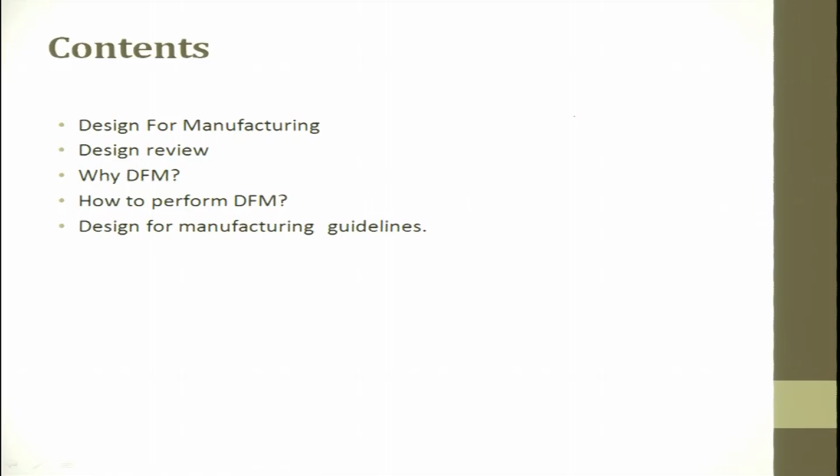In fact, food industries have started following design for manufacturing. The definition of design for manufacturing is a design technique for manufacturing ease of an assortment of parts that would constitute the final product after assembly. So it is not only for a single part, but for an assortment of parts.

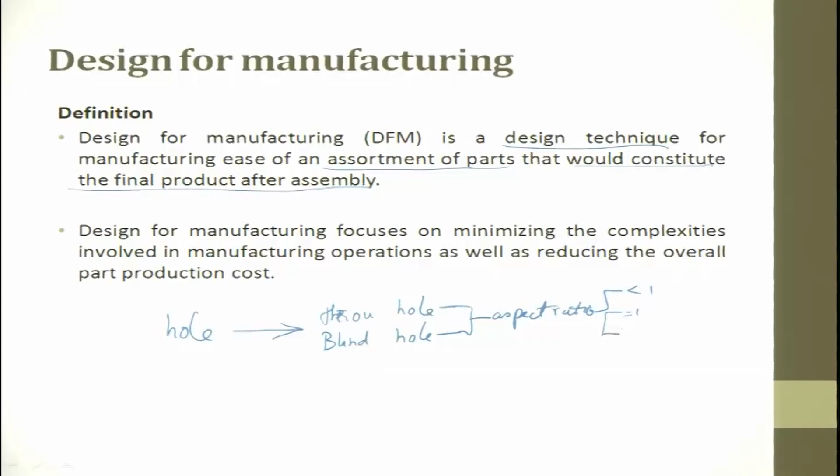For example, when I talk about a hole, you can have a through hole, you can have a blind hole, and you can have blind holes and through holes for varying aspect ratios, where the aspect ratio can be less than 1, equal to 1, or it can be greater than 1.

So you see here a hole, just a hole, and if the thickness of the material is very less, then this hole can be created by a punch. When you talk about a punch, we also have square punches, so a square hole can be made, but the process is different, depending upon the sheet metal.

For example, when sheet metal is used for a desktop computer, you see on the sides of the cover a lot of holes. These are basically air vent holes to remove the heat generated during the working of the computer. So you can also have punched holes where square holes can be made, or perforations can be made.

If you want a larger thickness, then the hole can be of two classifications. So what I am trying to say is about this assortment of parts that could constitute the final product after assembly. We are not talking about a single part becoming a product.

DFM cannot be used in a big way for a single part, you cannot enjoy more of DFM. If you have several parts put together into a sub-assembly, and several sub-assemblies put together into an assembly, meaning a product, then you can think of enjoying the advantage of using DFM. Design for manufacturing focuses on minimizing the complexity involved in manufacturing operations as well as reducing the overall part production cost, while maintaining variety.

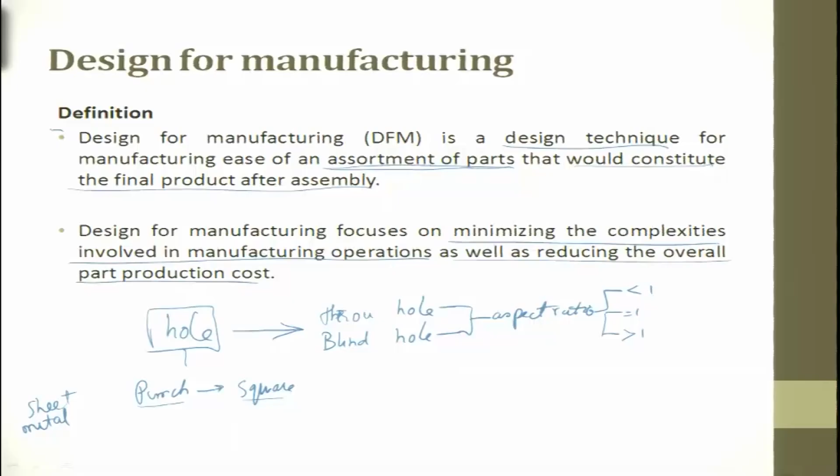So when you try to follow design for manufacturing, we try to group the operations, and once you group those operations, we try to generalize a machine. Once you start generalizing the machine, then we start generalizing or producing parts in a standard manner.

So design for manufacturing is also the process of proactively designing products to optimize all the manufacturing functions like fabrication, assembly, testing, procurement, shipping, delivery, service and repair.

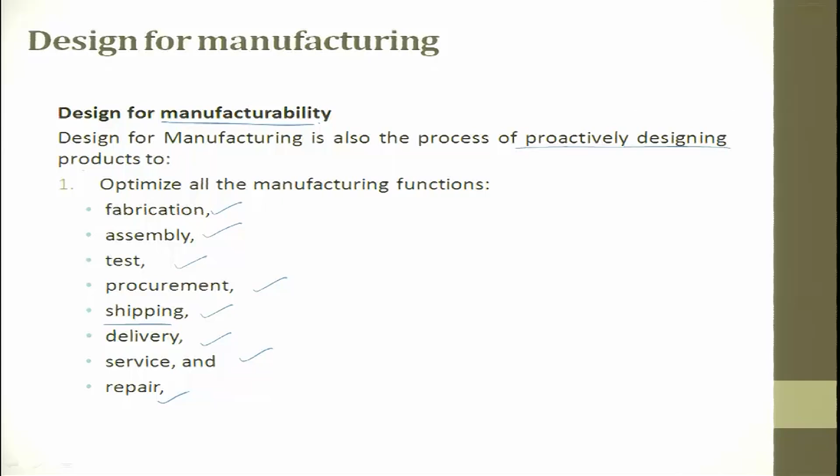When we talk about design for manufacturing, it is interesting to know shipping is also part of manufacturability, so are delivery, service and repair. So here we are trying to talk about manufacturability, design for manufacturability.

Design for manufacturability is also the process of proactively designing products to assure the best cost, quality, reliability. Reliability and repeatability are two different terminologies - you should understand that. I repetitively do a job, that is different.

Whenever I try to start, for example, a cell phone which I have not used for 3 months - when I start operating it after 3 months, I put the battery back and press the on button, and it starts working. That is reliability. I put a key in the keyhole of a car and start cranking it, and it starts working. That is reliability.

Repeatability is a different story. I try to produce the same part, and I get consistency - that is repeatability.

Then regulatory compliance - that means to say it is energy efficient, it does not produce fumes, it does not use any byproducts which are hazardous in nature. So all those things are regulatory compliance.

Safety, time to market, which we have already dealt with when we do the initial design itself - what is the time it is going to take from understanding the customer voice to giving it to the customer as a finished product, that is called time to market.

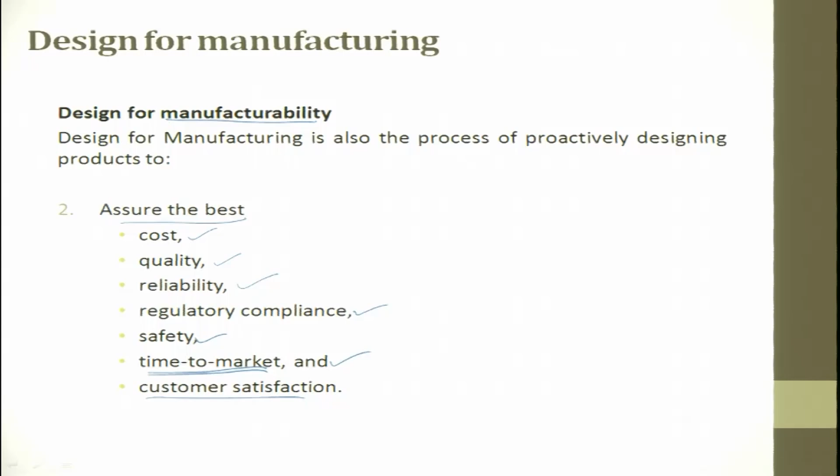Then completely customer satisfaction - all these things are assured when we follow this design for manufacturability. Design for manufacturability is a process of proactively designing products to meet out all these things.

The purpose of a design review - design for manufacturing can be done for a new product or for an existing product. For an existing product, you take it, go to the customer, ask what is the problem, come back and start sorting it out. Maybe it is cost, maybe it is performance, maybe it is even appearance.

So you come back, get the feedback, sit on your design desk and start working on how to redo it such that you can meet the customer's satisfaction. So design for manufacturing can be done for an existing product, and also for a new product which is getting evolved. The purpose of a design review is to provide a systematic and thorough product process analysis.

Product and process, please note it down. Product is a chair, product is a table. Process can be carpentry, process can be injection molding, process can even be machining or sheet metal process. So, through product process analysis.

The next point is a formal record of that analysis. The third one is feedback of the design team for product and process improvement. So the process of a design review has these 3 points.

So you try to provide a systematic and a thorough product process analysis, then you try to look at a formal record of that analysis, whatever you have done, and then you try to give a feedback to the design team from the product process analysis and improvement, what is to be done.

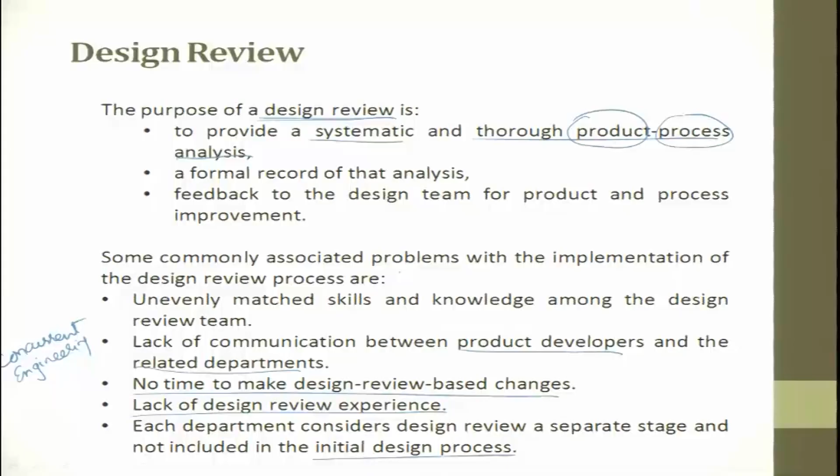Lack of design review experience. Each department considers design review a separate stage and does not include it in the initial design process. So these are some of the problems which are associated and which always make this design review a failure. So please make a note, you should have a strong team, you should have a team with multiple skills, you should not give a cosmetic change, you should look at changes which are very fundamental, completely relook into it, then hit into the market. And when you try to do it, every department should understand that the design process is the initial process compared to the rest.

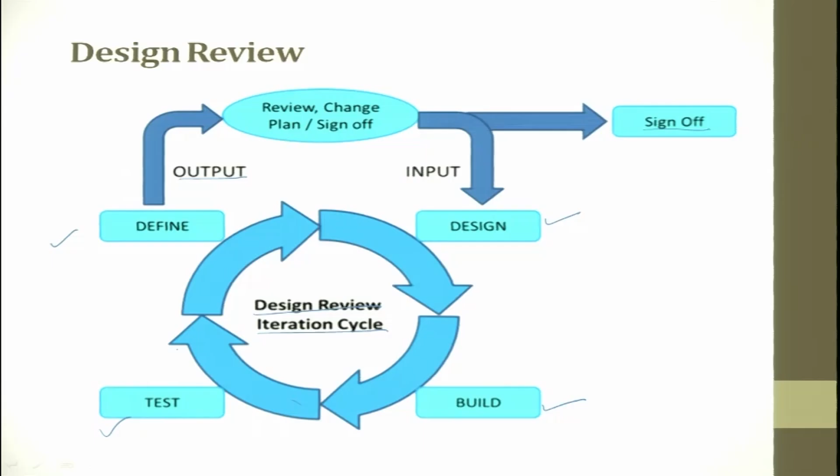So this keeps going on, and what I am talking about is not only for a software product. The same thing is also used for games, video games. The same thing is also used for automobiles. The same thing is also used for domestic appliances. No product enters the market the best way. That means to say there is always a chance or a scope for improvement. So that is why this design review iteration cycle keeps going on.

So, there are soft and hard reviews. So, what are the soft and hard reviews? The soft-hard review addresses the need to design a product for safety in terms of the real world conditions. It is predominantly looking for safety. The soft reviews look into the careless misuse of products by users beyond normal wear and tear.

Very crudely, very jovially speaking, people many a times use their pen to clean their ears. It is just a careless misuse of the product. Okay. And then they dig their ears and then come back and start writing on a piece of paper. The ball gets stuck from rotation, then they start cursing the product that it has not performed what it is supposed to perform. So, these two are called soft and hard reviews.

So, soft hard review is for addressing the product for safety. Soft reviews look at the careless misuse of the product. Then there is another tool which is very effectively used, which is called FMEA, failure mode and effects analysis.

This is used when the product is getting designed itself, to evaluate what can be the possible failure of this particular product, and if this part fails in the entire product, what effect that is going to have on the complete performance of the product. So, one failure here in the product, what is the performance decline? That is what they do, and the performance decline can be safety, can be efficiency, can be even look.

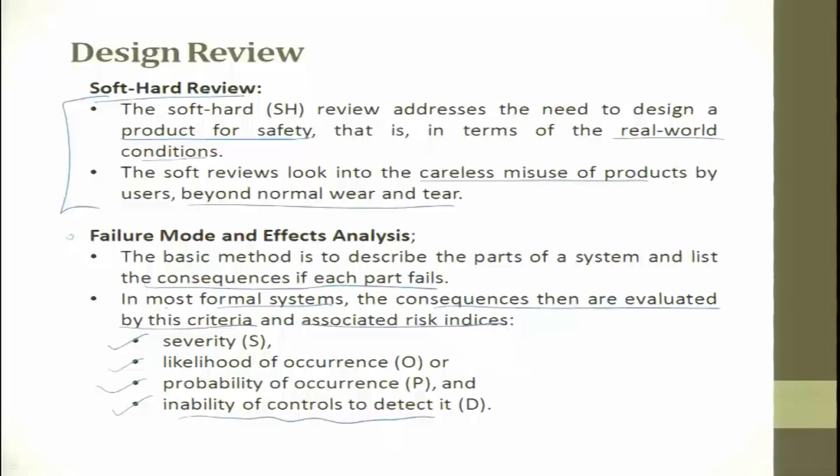Next is experimental design. Here we try to do experiments and then try to figure out the optimum parameter. In experimental design, we take a process in which there are 3 input variables x, y, and z, and one output variable O. Now you have to find out the best process parameter to choose for each of these such that you get the best output.

So, if I start doing experiments, maybe x can vary from 0 to 100, I am just giving a range, y can vary from 0 to 100, z can vary from 0 to 100. If I fix y and z and keep changing each individual value of x, I have to do so many experiments to find out its influence. In the same way, I will fix x and z and vary y. Same way I will fix x and y and vary z.

So you see there are so many experiments to be conducted, and conducting experiments is going to be costly. You have to have so much raw material and machines to conduct and evaluate them. So why don't we have a structured way of doing it? The structured way of doing it is nothing but designing proper experiments.

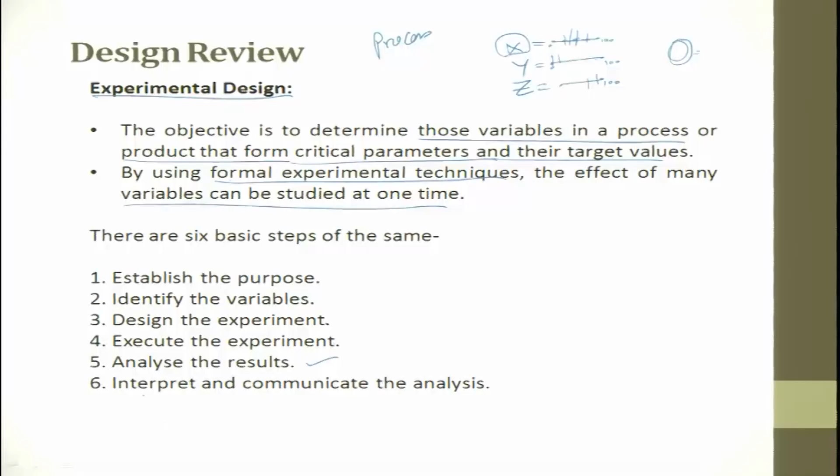So when I try to do experiments at various process parameters, I try to get the output, and once I get the output, I analyze the result. So here I plan for experiments, then I do the experiments, then from the experiments I try to get the output. So that is the analysis of output, and from this analysis I try to give my own interpretation and communicate the analysis back to the system such that the product performance can be enhanced.

Then why DFM? DFM methodology allows for new or improved products to be designed, manufactured and offered to the consumer in a short amount of time. So the time from the design state to go to the customer state is very important. When you follow DFM, you will try to reduce that time. DFM helps in eliminating multiple revisions and design changes that can cause program delays and increased cost.

So when NASA was trying to work on enhancing their productivity, they followed design for manufacturing as a concept, and they tried to standardize so many parts, and they also standardized certain sub assemblies, and their assembly was made very fast. The productivity of making a launch became very fast.

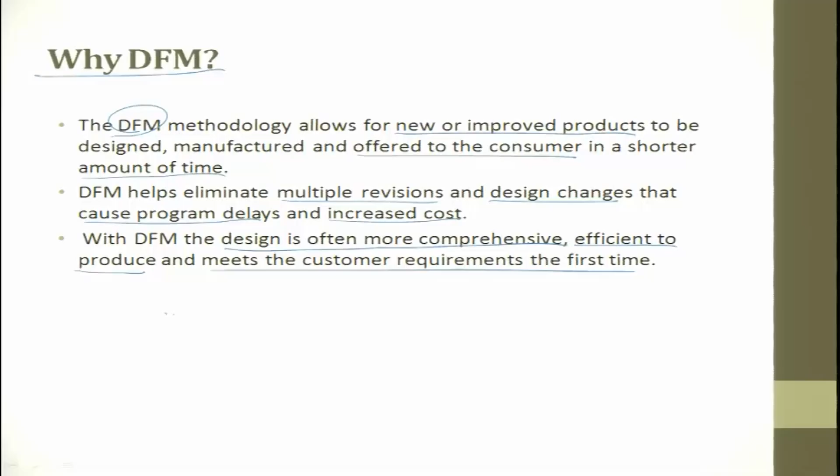With design for manufacturing, the design is often more comprehensive, efficient to produce and meets the customer requirement the first time itself. So earlier people were talking about let's make prototypes and then show it to the customer and then start. So prototype to customer, then they said prototype to product, then we will show to customer, and then when the customer says, there will be a feedback which will go back and forth. Today what we say is, the first piece we produce should be the best piece. So the customer requirements are met the first time itself.

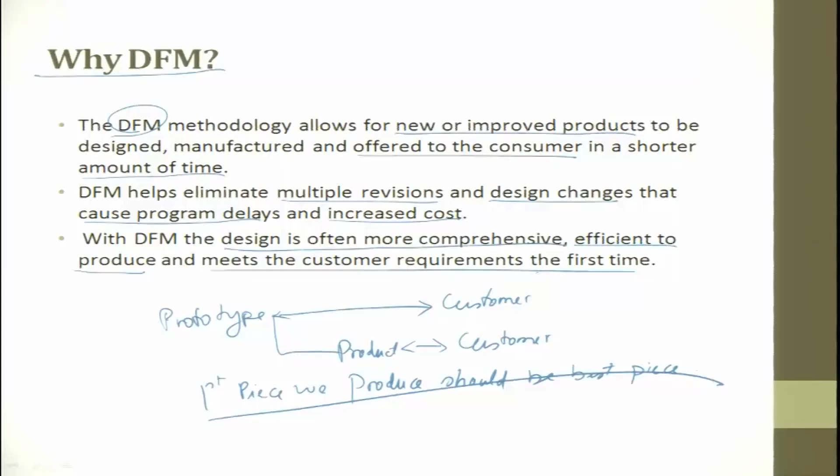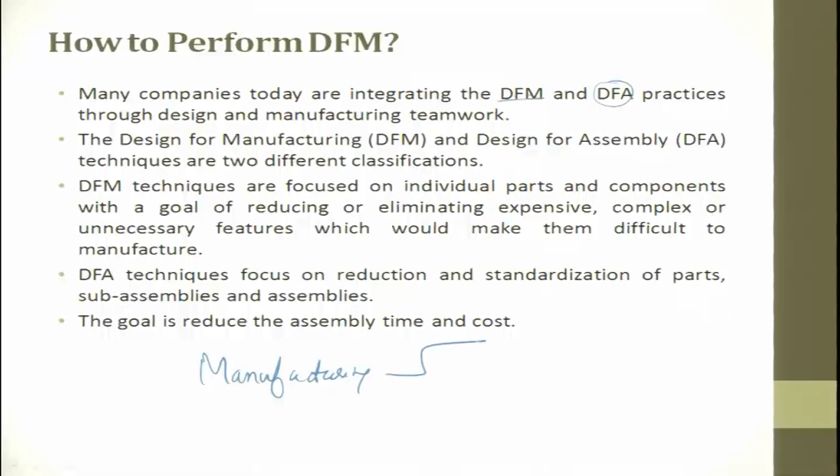How to perform DFM? Many companies today are integrating the DFM and DFA practices. DFM is design for manufacturing, DFA is a subset, design for assembly. So now they are integrating; see, assembly is a separate source. So when you talk about manufacturing, there are 2 approaches, I have told earlier also. It is part producing and then assembly. So assembly is a subset of manufacturing. So today people have started blending this assembly into manufacturing practice, so that the design and manufacturing team can work together in implementing DFM concepts in the product development.

Design for manufacturing and design for assembly techniques are two different classifications. Design for manufacturing techniques are focused on individual parts and components with the goal of reducing or eliminating expensive, complex or unnecessary features which would make them difficult for manufacturing. So what we are trying to talk about here is try to make the geometry as simple as possible and try to remove unnecessary features such that you can quickly produce the part and meet the requirement.

DFA techniques focus on reduction and standardizing of parts, sub-assemblies and assemblies. So DFA is only from the assembly point of view. The basic goal is to reduce the assembly time and costing. So the moment you are doing manual assembly, if you standardize it, then comes the conveyor belt. In a conveyor belt, the parts move from machine to machine and the assembly keeps happening.

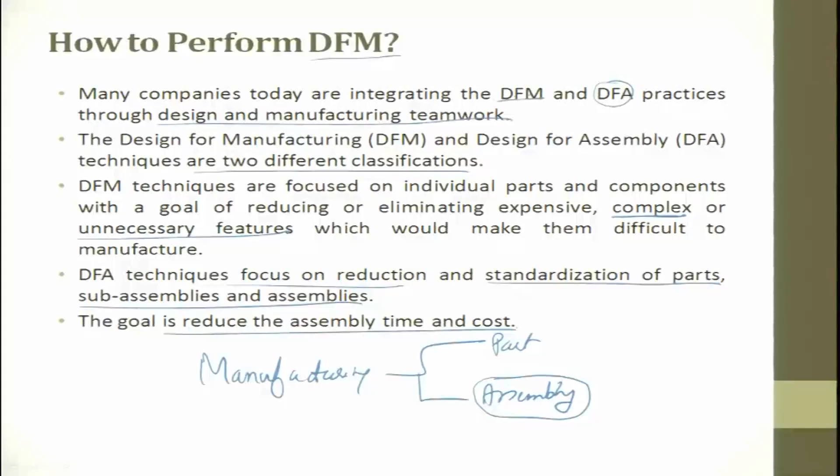The first guideline is minimize the number of components in the product. When you take a PCB or a RAM or a mobile phone, in a mobile phone the only moving part is the vibrator. All the rest of the parts are static; the moving parts are removed. The moment you have moving parts, first assembly becomes a challenge. Then the wear and tear concept also comes into existence. So in order to avoid wear and tear and a lot of defects in the assembly line, people suggested reducing assembly operations as much as possible, which boiled down to reducing the number of parts. So assembly costs can be reduced.

I earlier told an example: people make furniture where they don't do assembly. They just ship the individual parts to the customer and give a manual, and the customer does the assembly. Why? One, the shipment cost for large-volume objects is expensive. So they pack the individual parts and move them, and no customer will pay extra for a product saying it is assembled. So assembly costs are reduced.

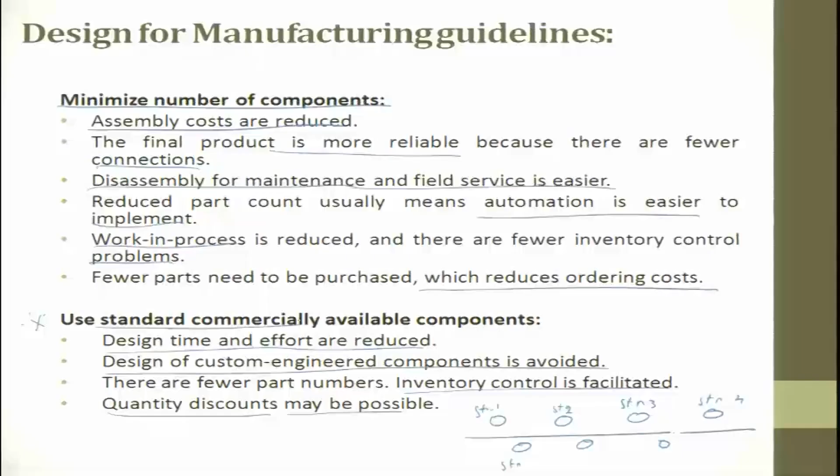That is what is followed in your shoe company: they put all the shoes into several boxes numbered 6, 7, 8, 9, 10 and then they give. So there are fewer part numbers, inventory control is facilitated, and quantity discount may be possible if you have standard commercial parts used for your product. Use common parts across the product line.

So if there are 10 places or 5 places where the shaft has to be used at several layers, assuming this is a product, here is a shaft, here is a shaft, here is a shaft. So use the shaft which is getting assembled across different product lines. So I am taking one product, you have multiple places where the same shaft is used.

Or what I am trying to say is I have a car and then I have several different models of the same car. For example, I can change the engine spec, I can give more comfort, I can give more space inside the car, I can give you different colors. So these are all different varieties in which a single product can be given. So I have multiple lines. So I try to make the parts used in every line almost the same.

So predominantly I try to use the technology called group technology while doing this. So what is group technology? Group technology means you try to group different parts having almost the same features into one group so that you can start manufacturing at an economical price. Implementation of manufacturing cells may be possible. This we have gone one step deep into.

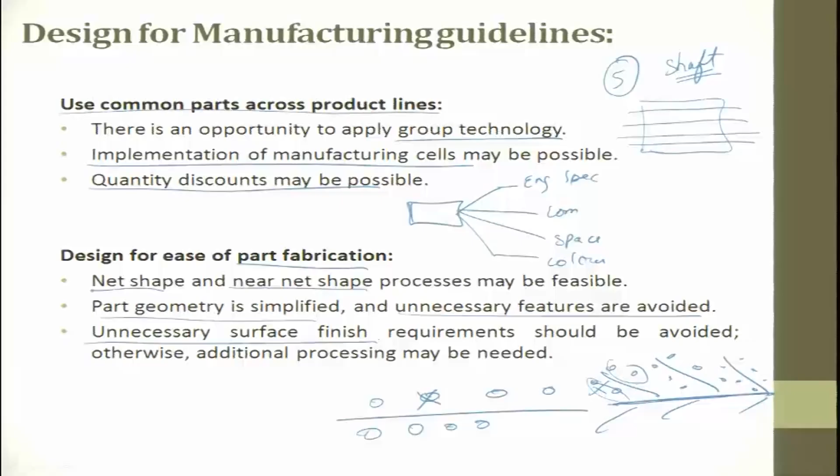You can have aluminum, magnesium, titanium, steel, whatever you want, and the shape and size produced exactly match the requirement in the real situation, or the product dimensions. So this is design for ease of part fabrication. Choose processes such that you can produce to the near net shape. The part geometry is simplified, unnecessary features are avoided, unnecessary surface finish requirements are also avoided. So this makes for ease in part fabrication.

Next one is design parts with tolerances that are within the process capability. Do not try to just demand a tolerance of 0.001 millimeter for a part that mates with another part, a male and a female part. Why did you ask? I thought this is good, but can your machine make it? No, it cannot make it. So since you gave this dimension, I am going to add one more process while producing the shaft or hole and pass the process through that.

So what we are trying to say in design for manufacturing is, knowing the capability of the process, you try to change your design such that you do not give these high tight tolerances. The moment you do not give tight tolerances, the process which is trying to make it becomes easier, and the process capability of that process is also higher. So tolerance tighter than the process capability should be avoided, otherwise additional process or sortations will be required.

Bilateral tolerance should be specified. This is because when you talk about assembly, you have maximum material condition assembly. So you try to take a shaft and a hole, the maximum material condition of the shaft, maximum material condition of the hole, then you try to understand what fit you want. So the tolerances play an important role.

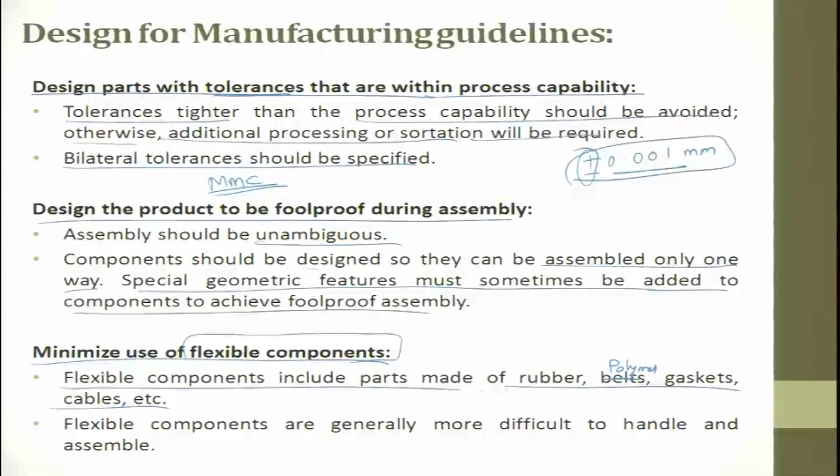Flexible components include parts made of rubber, polymer, gaskets and cables, which have to be avoided. The flexible components are generally more difficult to handle in assembly, because when you try to do automatic assembly, these flexible components' shape and size get deformed when the assembly happens.

So we have a task. Try to look at your desktop computer and then try to find out locations where they have used DFM. This will, when you start doing this cross sectional analysis of the desktop, help you appreciate how DFM is followed in the electronic industry. Thank you very much.